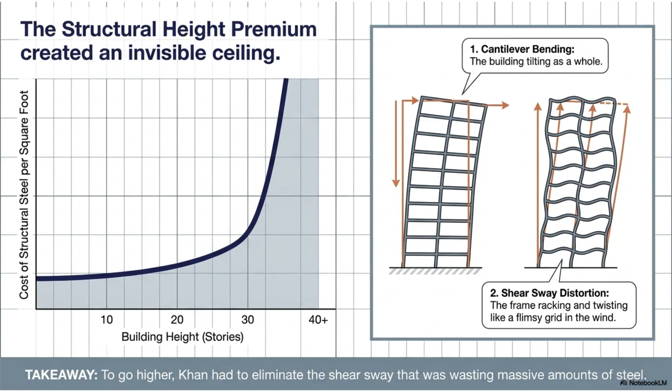In the mid-century, height came with a premium that few could afford. As buildings grew taller, the wind became a relentless enemy. Traditional frames suffered from shear sway, twisting like a flimsy grid. To fight this, engineers simply added more steel, but the costs spiked exponentially. It was an economic and physical dead end. To break the ceiling, Khan knew he couldn't just add more material. He had to change the shape of the system itself.

Before the 1960s, skyscrapers had a height problem. To go taller, they needed massive internal columns that ate up floor space, yet they still wobbled under wind pressure, a phenomenon called shear sway. Think of it like a grid of sticks struggling to hold its shape. Then came Fazlur Khan's hollow cantilever paradigm. Instead of hiding the strength deep inside, Khan pushed the structural support to the exterior perimeter.

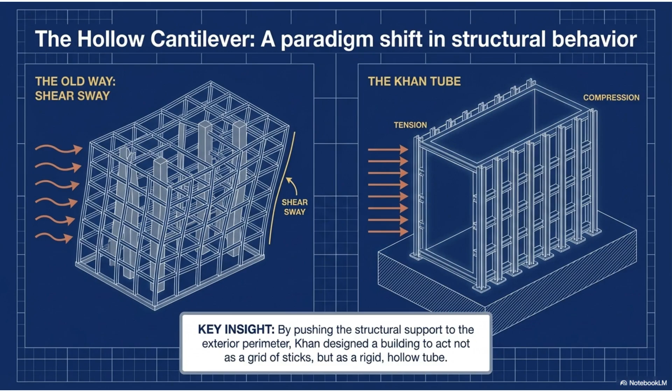By spacing exterior columns closely together and joining them with deep beams, the entire building began to act as a rigid, hollow tube. Under wind load, the Khan tube transforms lateral pressure into simple vertical forces, tension on the windward side and compression on the leeward. This revolutionary shift allowed buildings to reach unprecedented heights with less steel and more open space. It wasn't just a new design, it was a structural rebirth.

Why did the Khan tube change everything? It wasn't just about height, it was about economics and utility. Compared to the traditional frame, the tube system rewrote the rules. While old-school frames suffered from shear racking and became prohibitively expensive past 30 stories, the hollow cantilever remained stable and economically viable at 100 stories and beyond.

By pushing the strength to the perimeter, Khan achieved the impossible, using 50% less steel while creating wide-open, column-free floor plans. Architects no longer had to design around a cluttered forest of internal supports. This efficiency turned the skyscraper from a space-consuming luxury into the lean, functional backbone of the modern skyline.

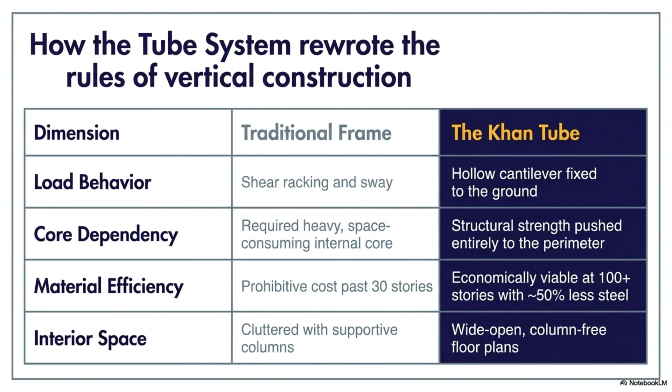The tube concept wasn't a static invention, it was a rapidly evolving lineage. It began in 1962 with the framed tube at the DeWitt Chestnut Apartments, using closely spaced columns to create a rigid hull. By 1968, the tube-in-tube design at One Shell Plaza added an inner core for extra strength. The innovation reached a visual peak in 1969 with the trussed tube, seen in the iconic diagonal bracing of the

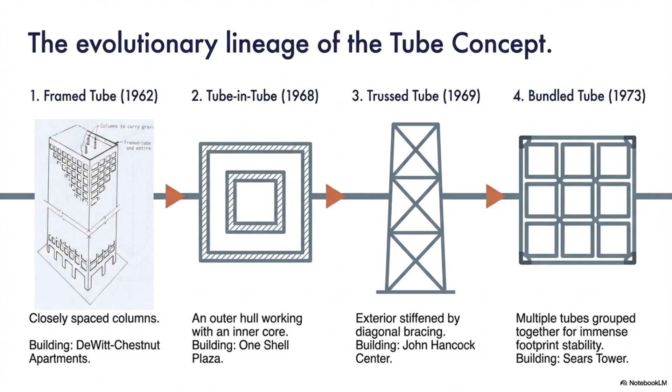John Hancock Center. Finally, in 1973, the bundled tube was born. By grouping multiple tubes together, the Sears Tower achieved immense stability on a massive footprint. From a single square to a complex cluster, Khan's lineage turned the sky into a playground for structural engineering.

Standing at 1,127 feet, the John Hancock Center is the trussed tube in its purest form. Completed in 1968, its signature X-bracing isn't just aesthetic. Those massive diagonal members minimize shear lag, allowing the building to act as a single rigid unit against Chicago's fierce winds. But the tower's greatest strength was Khan's own integrity.

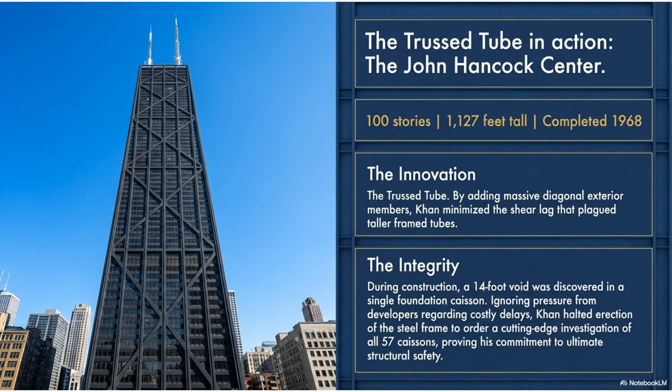During construction, a 14-foot void was found in a foundation caisson. Facing immense pressure from developers to ignore the delay, Khan didn't blink. He halted the entire project to inspect all 57 caissons. This commitment to safety ensured that the Hancock didn't just reach the clouds, it stood on a foundation of absolute trust.

How does a building become a hyper-stiffened box? By making the diagonals do the heavy lifting. In a trussed tube, those iconic X-braces serve a dual purpose.

First, they tackle wind loads, acting simultaneously as inclined members and shear resistors to prevent swaying. Second, they handle gravity loads, redistributing the building's weight evenly down to the corner columns. The takeaway is simple. These braces are far from decorative. They force every perimeter column to share the burden, transforming the skyscraper into a singular, ultra-rigid structure.

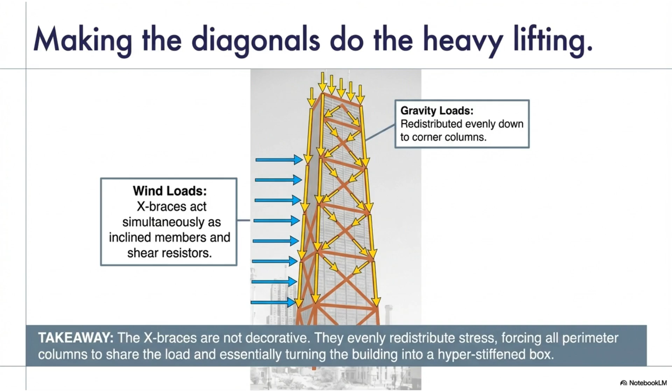By optimizing how stress moves through the frame, Khan proved that elegance in engineering is often found in the most direct path. To reach the top of the world with the 1,454-foot Sears Tower, Khan realized a single tube would be too wide and inefficient. His solution? The bundled tube.

By grouping 9 separate framed tubes into a 3x3 grid at ground level, he created immense stability against lateral wind forces. But the genius lies in the drop-off. As the tower rises, corner squares fall away in stages. This isn't just for style. It breaks up wind flow and creates that iconic tapering silhouette.

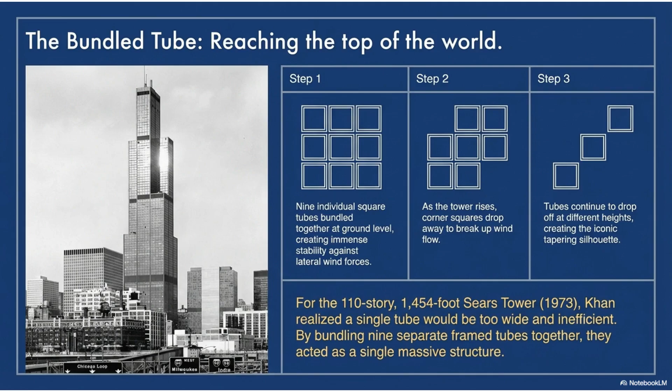Completed in 1973, this 110-story marvel proved that by bundling individual structures, we could build lighter, taller, and stronger than ever before. Khan didn't just build a skyscraper, he mastered the wind. Fazlur Khan's genius wasn't limited to vertical heights. He was equally transformative on a horizontal scale.

When tasked with the Hajj terminal in Jeddah, he faced a massive challenge, sheltering 80,000 pilgrims at once across 430,000 square meters. Khan's solution was the cable membrane tensile structure. By utilizing a lightweight fabric membrane as both the environmental enclosure and the primary structural element, he avoided the heavy, labor-intensive grids of traditional construction. This innovation allowed for an immense, unencumbered space that breathed with the environment.

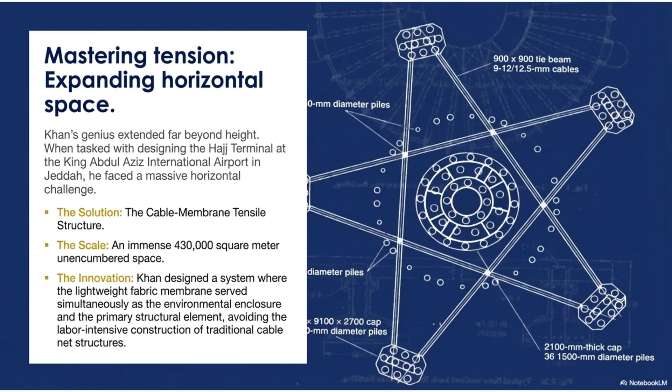It proved that whether reaching for the clouds or sheltering the masses, Khan's mastery of tension and materials could solve the most daunting architectural puzzles on Earth. Beyond the steel and glass, Fazlur Khan operated under a philosophy he called honest architecture. This framework rested on 3 pillars. First, structural efficiency, using technology to do the maximum work with the minimum material.

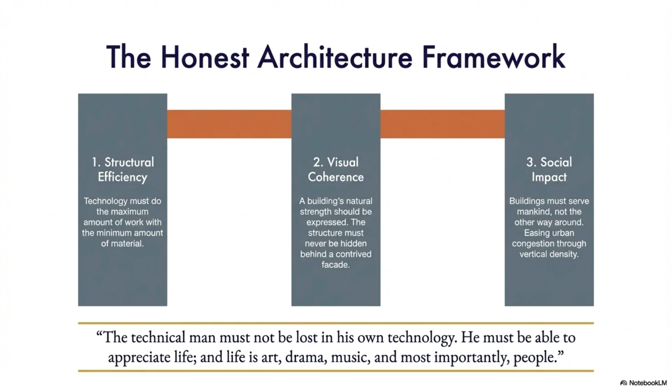Second, visual coherence, believing a building's natural strength should be expressed, never hidden behind a decorative facade. Finally, and most importantly, social impact. For Khan, vertical density was a tool to ease urban congestion and serve mankind. He famously warned that the technical man must not be lost in his own technology. He believed that engineering must always remain in service of life, of art, drama, music, and people. Khan didn't just build skyscrapers. He designed monuments to human potential.

Fazlur Khan began with a math and economics problem: how to beat the height premium that made tall buildings bankrupted by their own weight. He solved it with equations, but in doing so, he inadvertently birthed a revolution. By pushing the structural support to the exterior, he created structural expressionism. For the first time, the bones of a building weren't something to be hidden behind stone or glass.

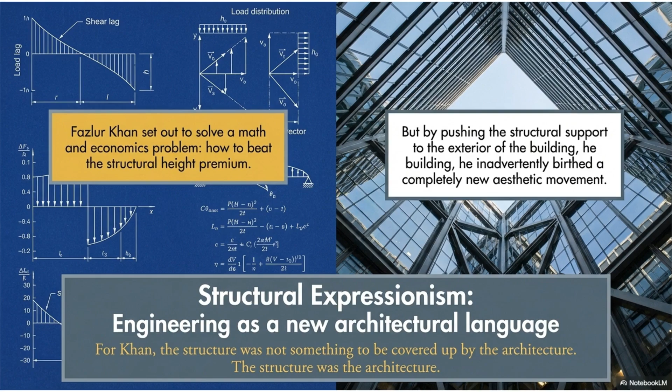They were the architecture. This new language turned load-bearing columns and wind-bracing trusses into the primary aesthetic features of the modern city. Khan proved that when engineering is honest and efficient, it doesn't just support life, it defines beauty. Fazlur Khan's revolution wasn't a solo act, it was a rare bridge between 2 worlds. In the 1960s, engineering and architecture often sat in silos, but Khan broke that mold through his close partnership with Bruce J. Graham of SOM Chicago.

It was a masterclass in interdisciplinary collaboration. Graham provided the bold architectural vision, while Khan brought the structural reality to make it stand. Together, they engaged in a creative exchange that dissolved the lines between their fields. As seen in these rough, hand-drawn sketches, their process was a raw evolution of ideas, turning scribbled concepts into the steel giants that define our horizon. It serves as a lasting reminder that the greatest leaps in science often happen at the intersection of logic and art.

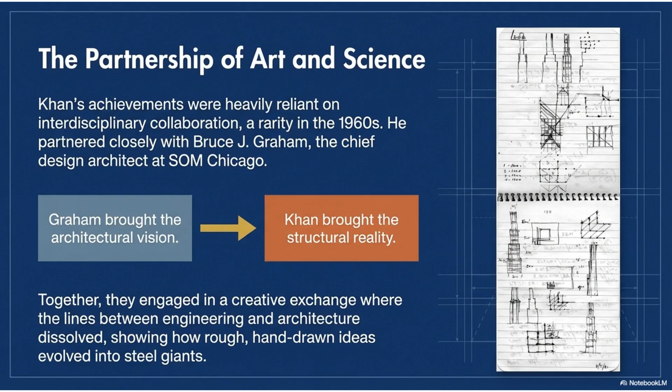Fazlur Khan's journey ended far too soon when he passed away in 1982 at just 52 years old. Yet, in a tragically short career, he accomplished what few ever will. He gave the modern city a new vertical scale. By challenging the old way of shaky material-heavy frames and replacing them with his revolutionary tube systems, Khan didn't just build taller, he built smarter.

From the tapering silhouette of the Sears Tower to the iconic X-braces of the John Hancock Center, his methods invigorated the engineering profession and established the gold standard still used by designers today. As the Engineering News Record noted, while his life was brief, his structures will stand for years, and his ideas will never die. Every time we look up at a modern skyline, we are looking at the enduring genius of Fazlur Khan.